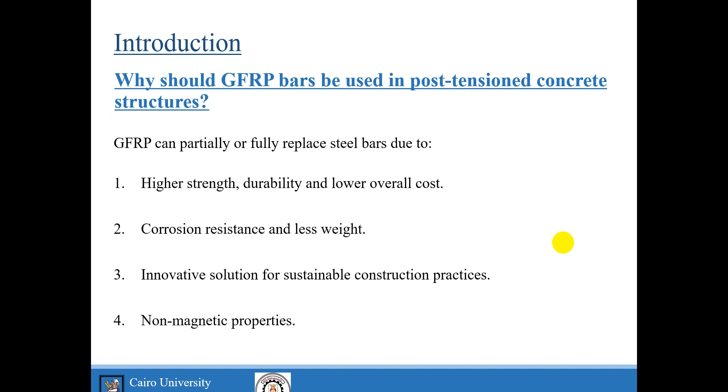It's just used in specific projects like marine structures, underground, some bridges, as we see in these photos, swimming pools, maybe parking, just specific structures.

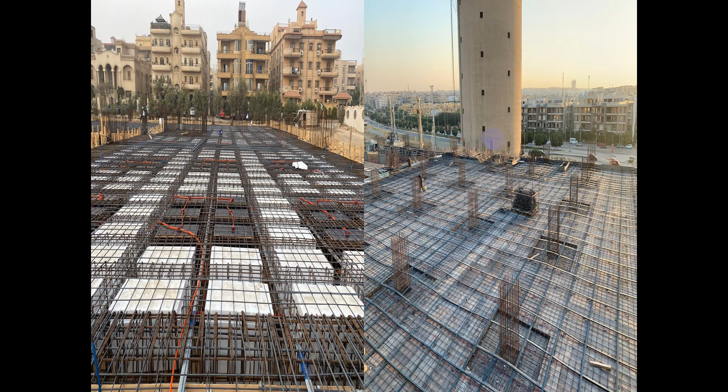On the other side, we all know the amazing advantage and the super magic of pre-stressed systems. And this slide shows a real project showing pre-stressed cables with steel bars, and this is the most familiar mix, as we say.

So to sum up what we said, what do we want to get? What is the purpose of these slides? We want the discussed advantages of GFRP bars, and at the same time we want to overcome the disadvantage of brittleness. So how can we do this? Are we magicians? No way.

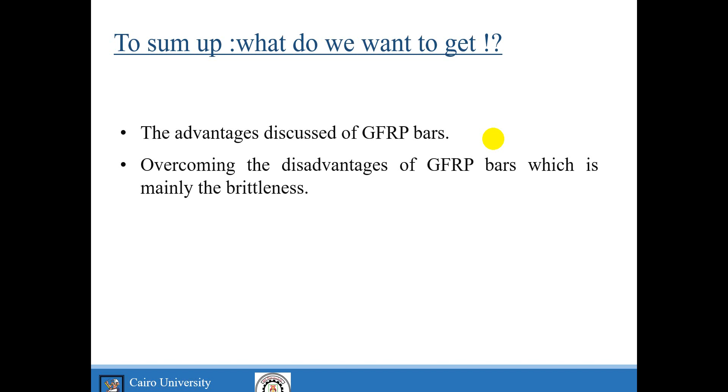To make this combination, we suggest adding GFRP bars with pre-stressed cables instead of normal steel bars to achieve what we want. So, is it applicable or not?

We will see. This is a case study from my thesis with the name of flexural behavior of fully pre-stressed bonded post-tension concrete beams reinforced with steel or GFRP bars. A long name, I know.

So the motivations, why? The research on efficiency of using this combination is so limited. Almost no real project is executed like that. Even research is not enough in this topic. Also, design codes lack guidelines on how to design this combination.

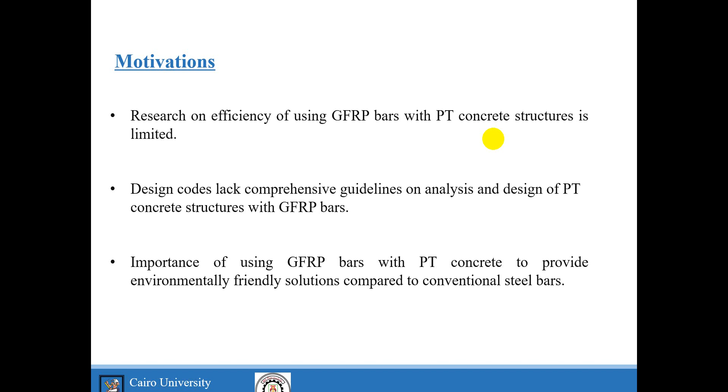Also, the importance of this combination environmentally, especially as we mentioned before. So we will see in my thesis, can we get what we want or no? The outline of my thesis is experimental program, results, comparison with some international codes, conclusion and recommendations.

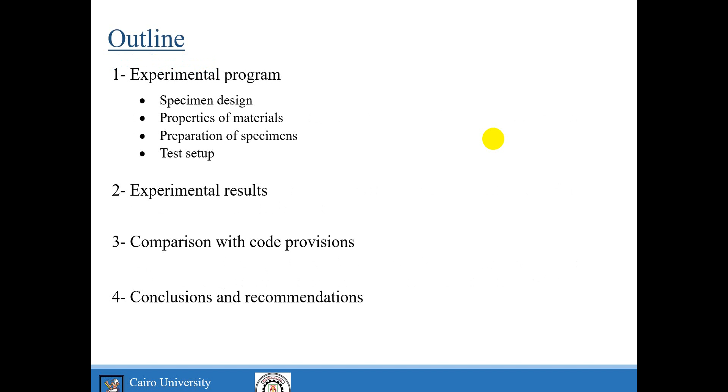So the main specimens are shown in these slides. Beams with GFRP or steel with strand, beams with steel only, beams with GFRP only, with the shown dimensions and section.

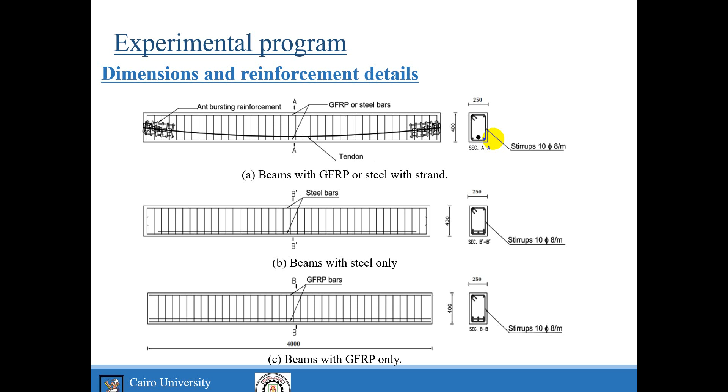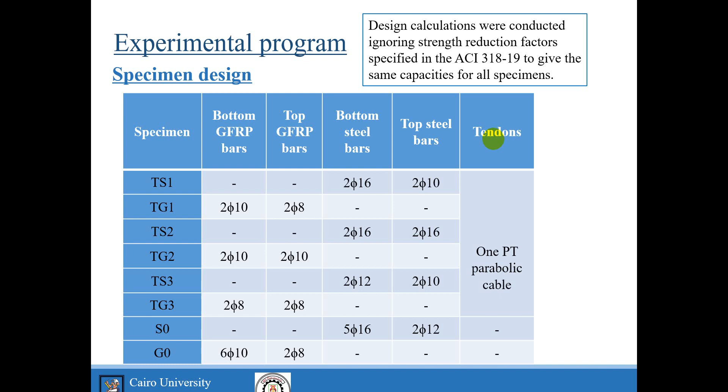So TS refers to cable with normal steel bars. TG refers to cable with GFRP. S0, normal steel bars only used. G0, GFRP only used without cables. And the design calculations were conducted ignoring the strength reduction factor specified in ACI.

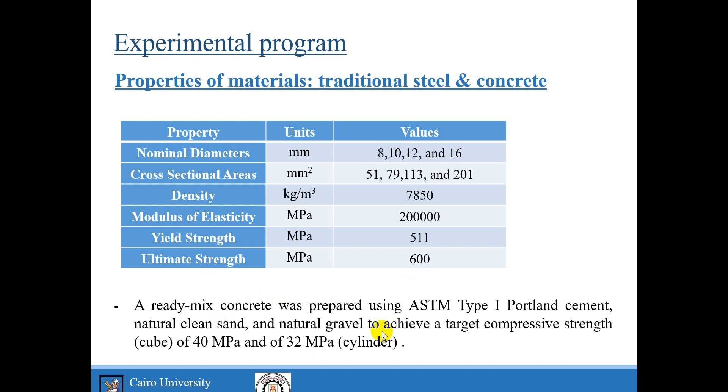So the materials used: this slide shows the properties of steel and concrete. As we can see, the yield strength is 511 with ultimate strength of 600, and cubic compressive strength of 40 megapascal. On the other side, the properties of GFRP and PT are shown in this slide.

As we can see, no yield in GFRP, with a tensile strength of 997. So as we noticed, no yield, which means it's a very brittle material giving no warnings in the structures. That's why it's not preferable to use alone, as I mentioned before.

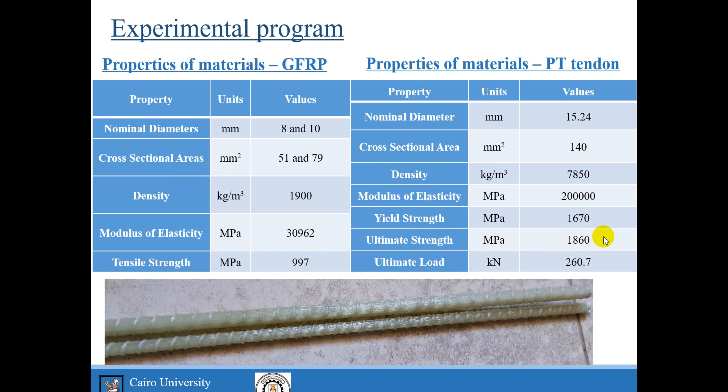For the cable, ultimate strength is 1860 with yield strength of 1670. The specimens were executed on site and transported to a lab.

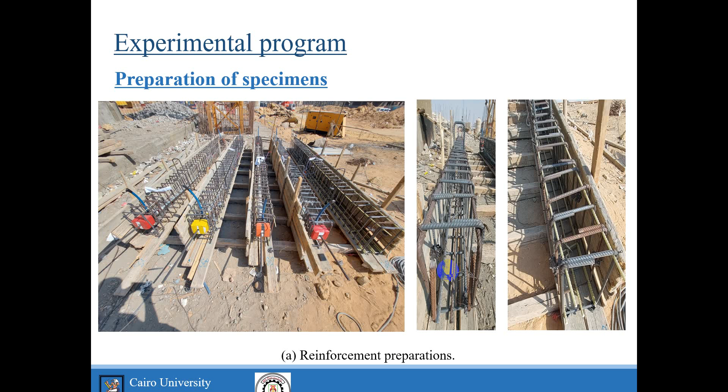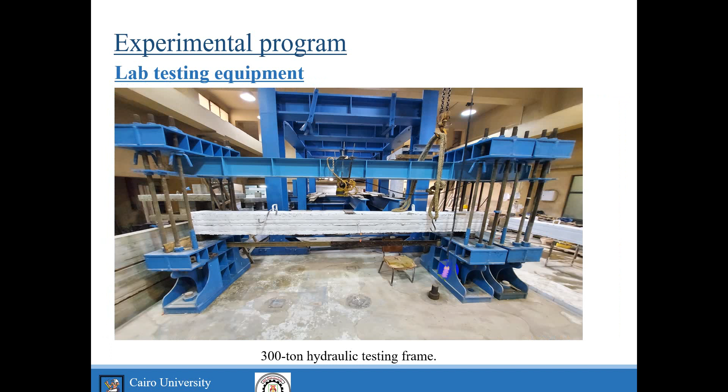These slides will show the sequence of construction: reinforcement preparation, strain gauge installation, shuttering, casting, compaction, stressing, then finishing, and the lab. And the results.

Before showing the main results, let's remember the stress-strain curve, the famous one that all engineers know when we design any RC building. Normal steel, pre-stressing cables, FRP are mentioned, noticing that the FRP stress-strain curve is almost linear.

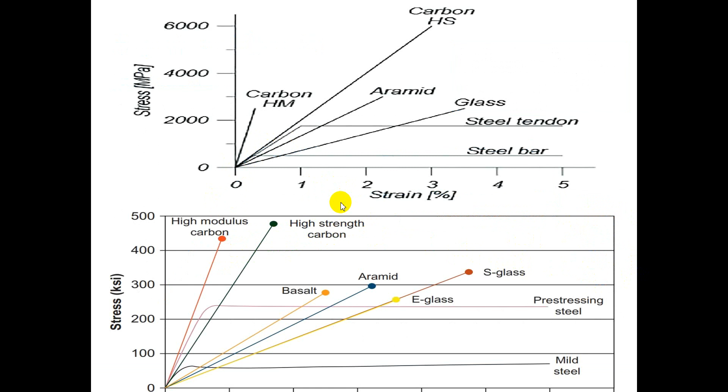So the main result I want to discuss is the load-strain. The G0 specimen, which is GFRP only without any cable, shows this linear behavior, and the others, TG1, TG2, and TG3, the specimens with GFRP and cables, show a curve almost similar to the normal one we know of mild steel or pre-stressing steel.

So I want to spot the light on this curve. This curve is a preferable one to overcome the brittleness and change it to ductile. Okay.

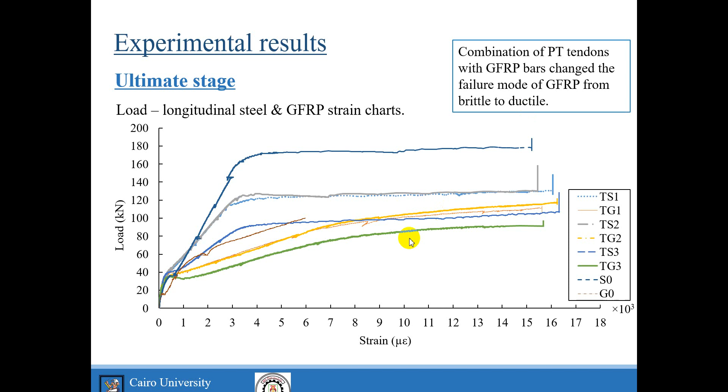In the used codes, we can see a ratio of the experimental failure to code predictions for the tested beams with ACI, EC, Canadian, and Egyptian codes. As we see, some codes show a highly conservative ratio. Most are within the range.

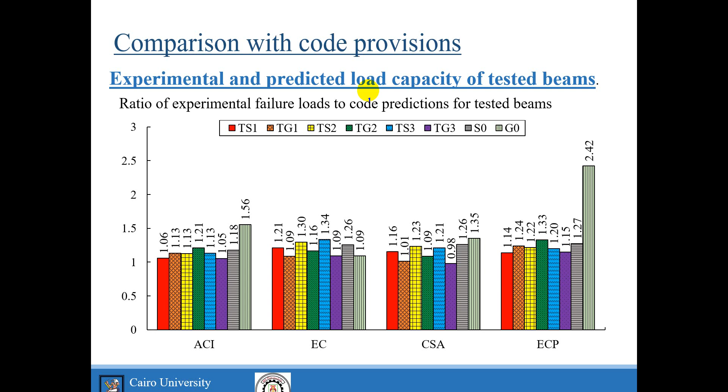So as engineers, each country uses a specific code. So just to know a quick comparison with codes and what's the best to design with, whether normal steel bars, beam, or GFRP, or mixed with cables. So it's up to you as engineer, the used codes and the country.

So we can classify the conclusion into two categories. Number one, impact of using PT tendons with GFRP bars, and number two, impact of replacing steel with GFRP and PT beams, as this thesis was focused on beams.

So for number one, beam G0, which is pure GFRP, showed the lowest load with a high deflection at failure without showing any descending curve after reaching the peak load, which is common for GFRP. Compared to beam G0, it can be concluded that using PT tendons with GFRP enhances the behavior from brittle to ductile, and this is the point of overcoming the disadvantage of GFRP.

The experimental results revealed that the beams with GFRP had smaller failure load and less cost compared to those with non-pre-stressing steel by up to 25 and 13% respectively. Knowing that this 25% can be reduced to, let's say, 10%, as the used material had a specific ultimate strength; it can be improved if we used another one, but that was the available material in the Egyptian market at that time. As we can notice, the cost was less, and this is also an advantage we want.

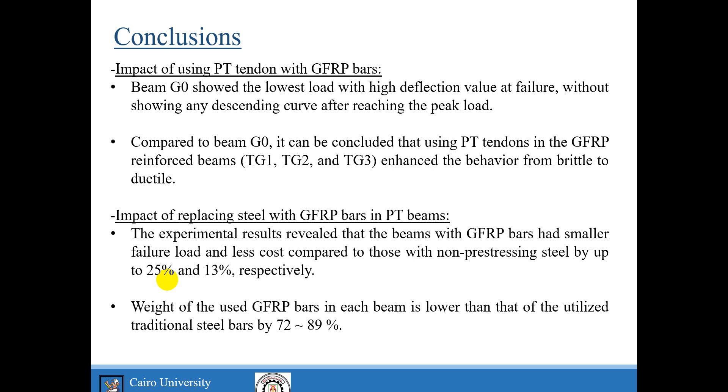So we get what we want briefly from the thesis: lighter buildings, less overall cost in the long term, almost the same failure load, and corrosion resistance, magnetic field, sustainability, all the other advantages we mentioned, with the super point of overcoming the brittleness, which happened with the cables. That's why we get what we want.

So the recommendations for future work: study long-term durability of PT with GFRP under various environmental conditions, including freeze-thaw cycles, wet-dry cycles, and exposure to more chemicals and fires. Implement a parametric study to assess the effect of a wider range of parameters. Study the dynamic behavior of this combination, and why not carry out flexural capacity prediction using AI or machine learning.

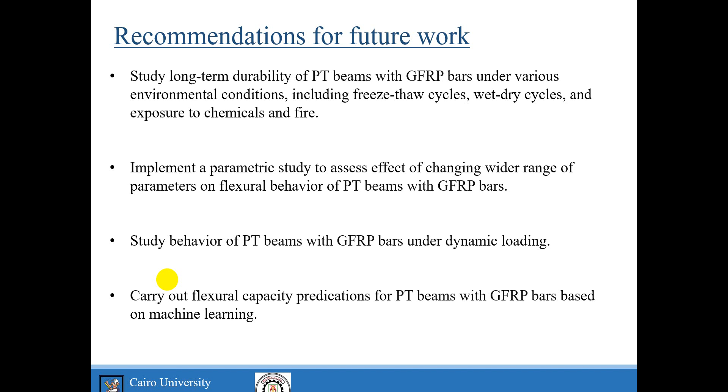That's the main point I want to discuss: why we want to go through this combination, what we want to implement, and where exactly the future is taking us. I hope that more studies can be done on this topic, as it's very important. It needs more concern, and really it's a super combination.